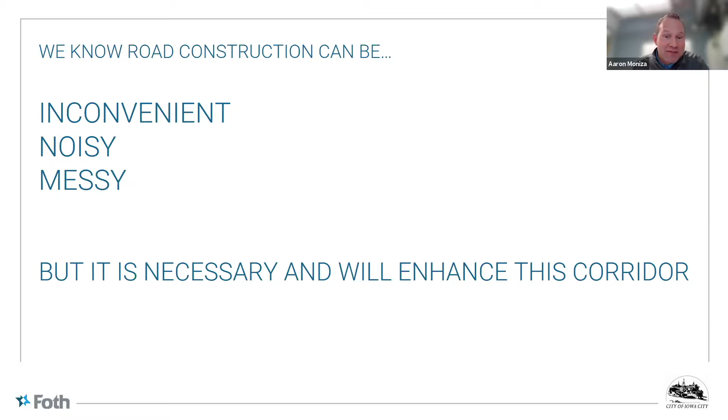Before we get into our discussion topics, we know that road construction can be disruptive. It can be loud, it can be dirty, and it interrupts the normal daily patterns of everyday life. But we wanted to set the meeting off as a kind reminder that when we get through this project, the community is going to have a beautiful, enhanced American Legion Road corridor when everything is all done. So we ask that everyone please be patient, and we'll work together throughout the construction phase to make this project a great success.

Here's our plan for this evening. First, I'm going to provide a quick overview of the project, talk about the upcoming improvements, and discuss the construction schedule. Then I'm going to hand it off to my colleague Clayton, and he's going to walk the audience through the various stages of construction and show how access is going to work in and out of the area. Finally, Mr. Sovers will let folks know how they can stay updated on the project, and we'll open up the meeting to any and all questions.

So let's jump into the project overview. It's always good to begin with the end in mind, and the reasons the city undertook improvements to this corridor are listed here on the slide. With the new Hoover School and potential future development in this area, the planned improvements will support the projected growth and upgrade the roadway infrastructure to current design standards, ultimately providing safe and efficient movement for all forms of traffic out there, be it pedestrians, bicyclists, or vehicular traffic.

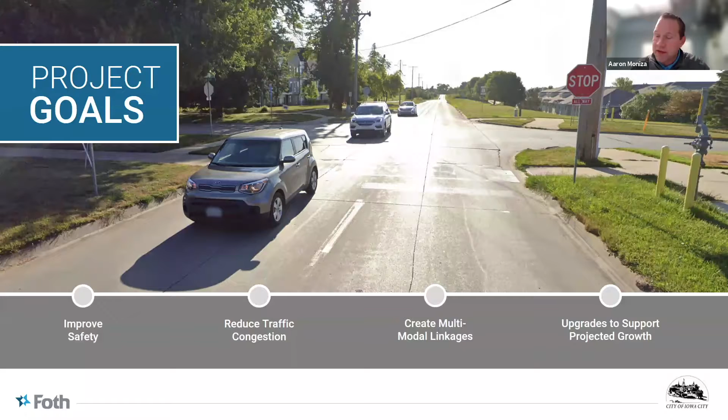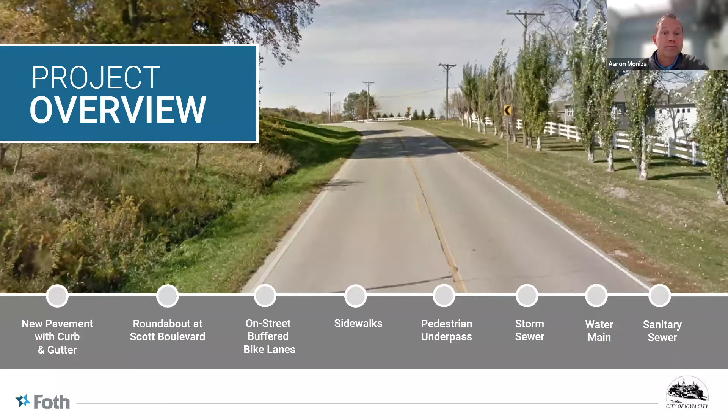The entire roadway is going to be reconstructed. This is going to include all brand new concrete pavement, curb and gutter, and upgrades to all the underground public utilities, such as storm sewer, water main, and sanitary sewer.

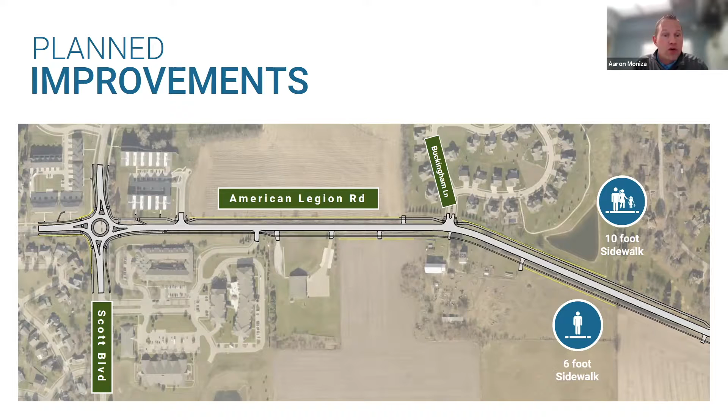A new single-lane roundabout will be built at the intersection of American Legion Road and Scott Boulevard, and this is going to help improve the safety and the traffic operations there at that intersection. The project will also include new sidewalks on both sides of the road: a 10-foot wide sidewalk on the north side, and a 6-foot wide sidewalk on the south side.

A new pedestrian underpass is going to be constructed down near the school, and this is going to have connections to the existing sidewalk system as well as to the adjacent neighborhoods.

And now finally, the new roadway will have one travel lane in each direction, as well as on-street bike lanes on both sides of the roadway.

One other thing you will notice is there will also be some improvements and relocations to some of the private utilities, including the overhead power, which is now going to go underground. So you won't see the power poles along the corridor here once we get through construction.

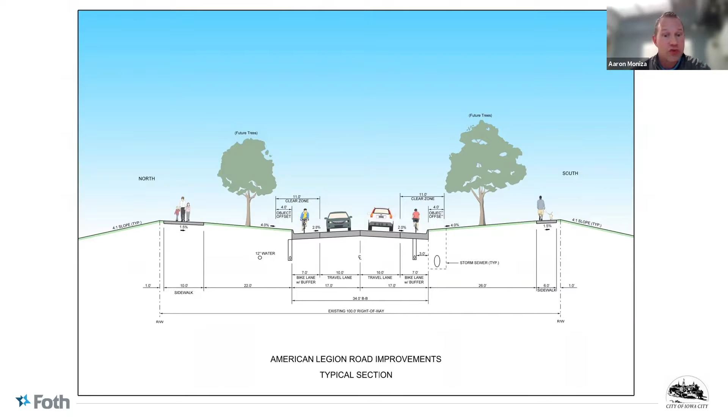So now let's talk about the schedule. For those of you that have attended either of the two previous public information meetings on this project, you know the city has been working on this for multiple years. Now where we're at is the design is complete.

The right-of-way and the easements needed for the project have been acquired. The relocation of the private utilities is pretty much done. And the contractor, PCI, is now under contract and ready to get going on construction. As of right now, construction is actually scheduled to begin next Monday, and is planned to continue until the fall of 2022.

Now, at this point, I'd like to hand this off to Clayton, and he's going to provide an overview of the construction sequence and access and what to expect here during construction. So, Clayton.

Thank you, Aaron. Again, my name is Clayton Carper, and I am a project engineer with Foth, and I will give a brief summary of the construction staging plan for this project.

As Aaron said, this is a 2-year construction project, and we'll start here in April and plan to wrap up in the fall of 2022. The anticipated construction start date is next Monday, April 26th.

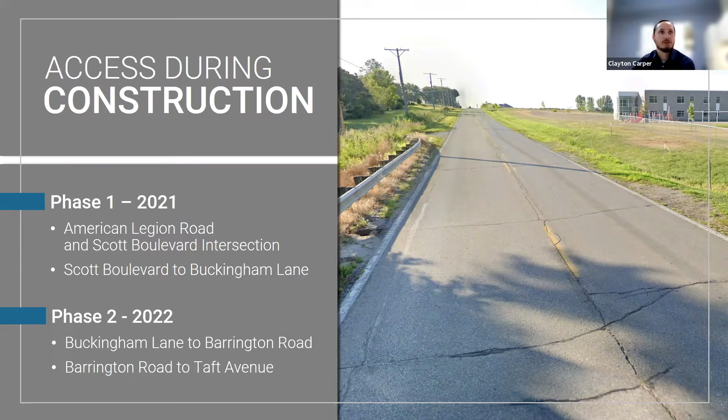Construction will begin at the American Legion Road and Scott Boulevard intersection, specifically the east half of the roundabout. The roundabout will be constructed in halves, east and west, to maintain traffic as long as possible. A temporary pavement will be constructed, and American Legion Road will be closed east of the Scott Boulevard intersection to Eastbrook.

Access will be maintained to northbound and southbound traffic on Scott Boulevard, as well as two-way traffic on Muscatine Avenue to the west. Access will also be maintained to Eastbrook Street during this stage, and a detour route will be installed for American Legion Road, which will utilize East Court Street. We'll show a detour map later on in this presentation.

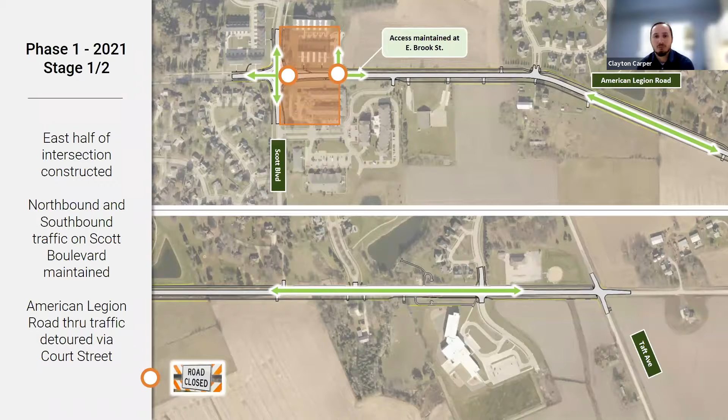Once the east half of the roundabout is constructed, the entire American Legion Road and Scott Boulevard intersection will be closed to construct the west half of the roundabout. This work will be completed under a full closure of the intersection and is planned to take no longer than 70 days. For this work, the American Legion Road detour route utilizing East Court Street will remain, and a detour route will be installed for Scott Boulevard, which will utilize First Avenue.

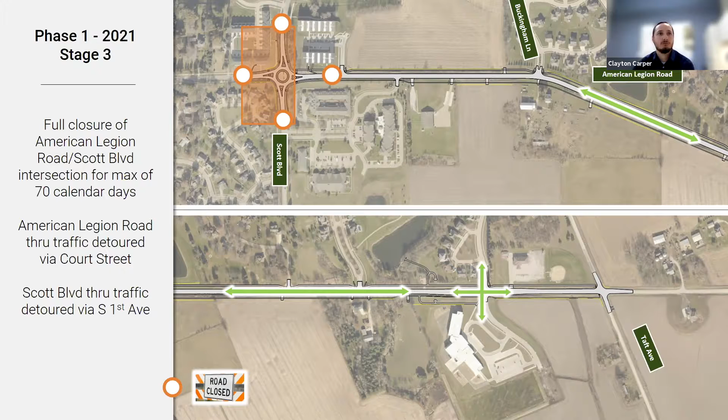After the roundabout at the American Legion Road and Scott Boulevard intersection is complete and open to traffic, American Legion Road will be closed east of Eastbrook Street to Buckingham Lane for construction of American Legion Road.

Access will be closed to those local residents who have access available other than American Legion Road—this being Silvercrest and Buckingham for this stage—and they will utilize signed detour routes. Those located within the construction limits who only have access via American Legion Road will have access maintained by the contractor during construction for those properties.

The city may look at maintaining access to Iowa City Church through Community View via the newly constructed Aiden Street. The detour route for American Legion Road will again utilize East Court Street. At the end of this stage, temporary pavement will be constructed at the project limits, and American Legion Road will be open to traffic for the winter. This will end construction in 2021.

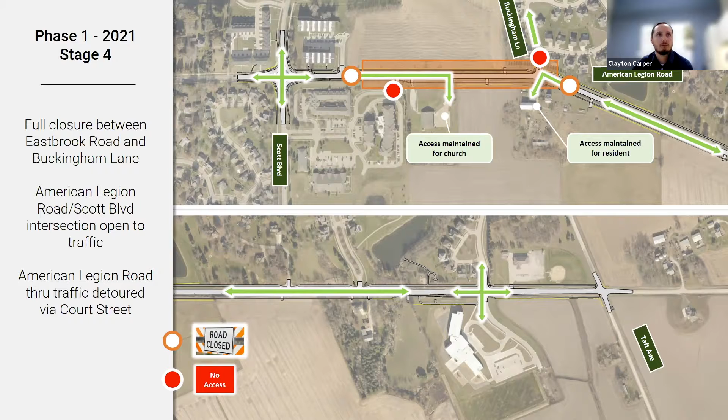Now in 2022, construction will begin where 2021 construction left off, somewhere east of Buckingham Lane. The estimated start of construction will be sometime in March or April of 2022, depending on weather. Construction will not take place within the Barrington Road intersection while school is in session.

Again, access will be closed to American Legion Road for those who have access available other than American Legion Road. In this stage, it is Fairway Lane and Arlington Drive, and they will again utilize signed detour routes. Since Fairway Lane is currently a dead-end street, a temporary connection will be made connecting Fairway Lane to Buckingham Lane, and this connection will be removed once access is opened back up to American Legion Road.

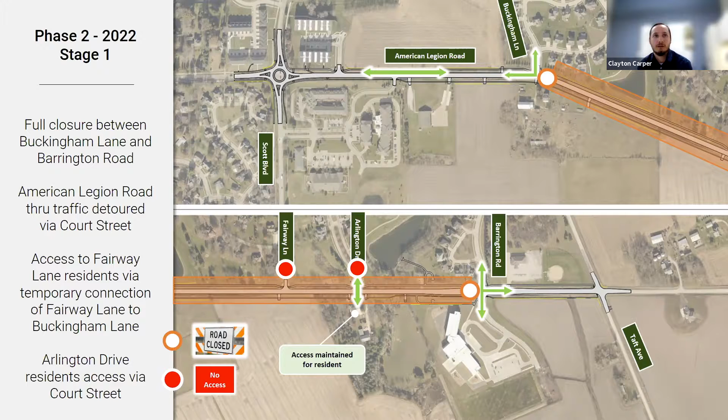Those located within the construction limits who only have access via American Legion Road will again have access maintained by the contractor during construction. The detour route will again utilize East Court Street for this portion.

So once school is out of session, the remaining portion of American Legion Road will be closed. Access will be maintained at all times to Hoover Elementary School during this stage, even though school is out of session. And the intersection of Taft Avenue and American Legion Road will maintain two-way traffic at all times during construction. It is possible that during these stages of construction, American Legion Road may still be closed and finishing construction from Buckingham Lane to Barrington Road.

The Barrington Road and American Legion Road intersection will be completed prior to school beginning in the fall of 2022. And again, the detour route for American Legion Road will utilize East Court Street. So this will be the final stages of construction for the project. And once complete, American Legion Road will be open to traffic once again.

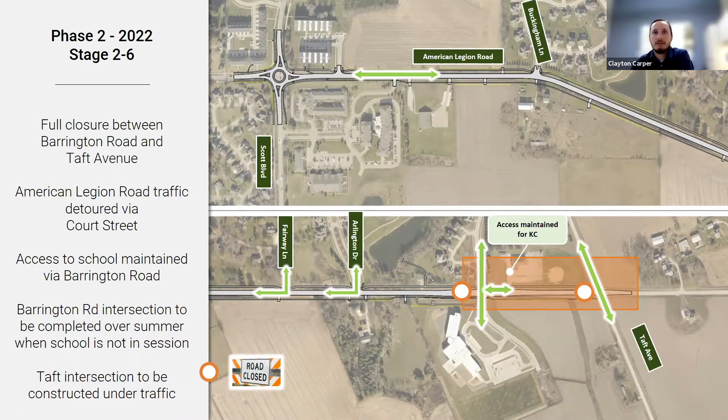So this is a detour route for American Legion Road that will remain in place throughout the entire project. The detour route will use Scott Boulevard, East Court Street, and Taft Avenue. And every stage of construction will utilize this detour route to some extent.

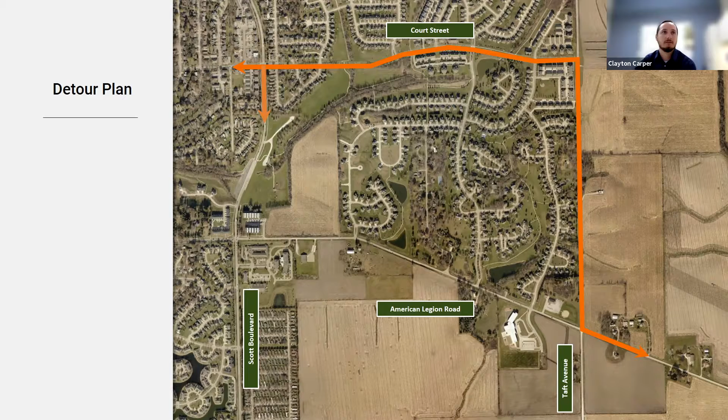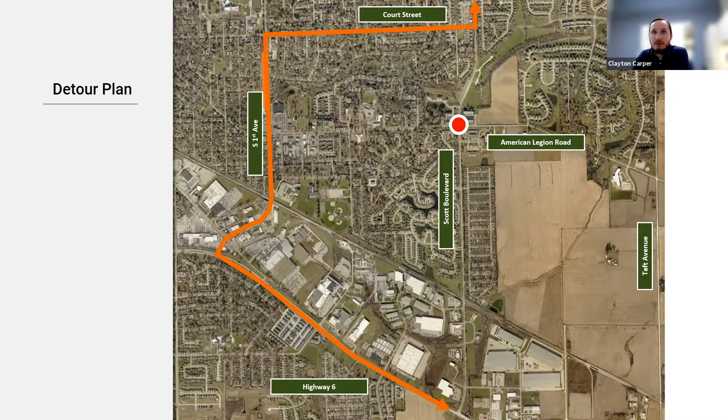This detour route shown is for Scott Boulevard during the construction of the west half of the roundabout, which will require the intersection to be closed. This detour route will use Scott Boulevard, East Court Street, First Avenue, and Highway 6. This detour route will go into effect sometime this summer in 2021 and is only planned to be in place for approximately 70 days during that construction.

So that's a real brief summary of the construction staging for both 2021 and 2022. And now I will just go over a few common questions that come up most often during construction. The biggest one being access.

So during construction, American Legion Road will be closed to all traffic. However, the contractor will maintain access to properties who only have access via American Legion Road. At times, there may still be some interruptions during paving operations, but you will be given advance notice if you are impacted. Mail delivery and garbage pickup may change depending on where you are located within the project.

Some locations will require cluster mailboxes that will be installed at designated locations. And for garbage pickup, you can set out your trash and recycling as you do now, and the contractor will empty bins and return them to you. And there may also be slight interruptions to water within the project, but again, you will be given advance notice for these instances.

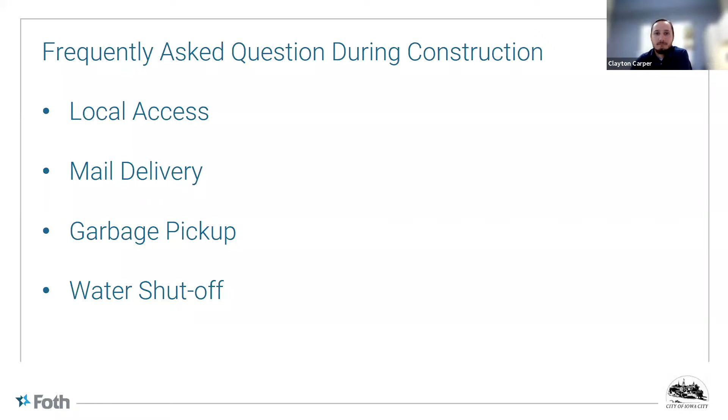Now I'll turn things over to Scott Sovers with the City of Iowa City to discuss project communication and help answer any questions.

Thank you, Clayton. Again, my name is Scott Sovers, and I am the Assistant City Engineer for the City of Iowa City. I will be your main point of contact for this project. Should you have any questions, as Aaron had pointed out, I included my contact information at the beginning of the presentation. We can certainly go back after we get through the presentation, so everybody can write down emails and phone numbers if need be too.

But in terms of communication, outside of getting in touch with me directly, we do have a website that will be set up for this project. The web address is shown there. We will periodically update the status of construction on the website, so you kind of know how construction is progressing throughout the project. We are also planning to set up an email list where we will send out periodic emails giving folks an update on construction. If you are interested in being a part of that email list, please get in touch with me and I will get you added to that list.

And like I said earlier, if something comes up and you feel more comfortable, just give me a call or shoot me an email, feel free to do that as well. And as has been noted on this slide, construction is impactful and it's disruptive. But please, as you're driving through the construction area, drive slowly and with care. Safety is our priority for both the construction workers and the traveling public, both vehicular and pedestrian. So with that, we'd be happy to open it up to any questions anybody may have.

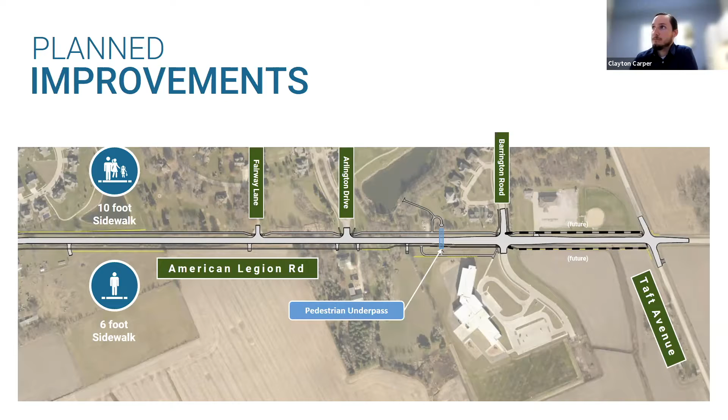Great, thank you very much. You're welcome. Aaron, someone was asking if you could pull up a slide of the roundabout to show the truck apron. Sure can, let me slide over.

Can you see, is there a new layout now? Can people see the layout? Yep.

So folks, to that gentleman's question we just asked, this gray area here is what's called the truck apron. It's delineated differently than the normal through lanes. Regular vehicular traffic, passenger cars, single unit trucks, use this light gray area, but this darker gray area in the middle is the truck apron, which allows larger trucks to off-track and use that. Now the colors are a little misleading - that doesn't apply to these four splitter islands, which are raised. It's really just here in the middle. But semi trucks - the geometry of the roundabout is designed to accommodate those types of vehicles, the large semi trucks.

If I may, Scott, I know another question came up in the chat about whether this information will be posted on the website for folks who aren't able to attend. Yep, the answer is yes. As a matter of fact, this virtual presentation is being recorded, and the city will get this posted to the project website at the conclusion of the meeting tonight, so anyone who wasn't able to make it can view it. There was also a follow-up about whether updates will be posted to the website as we move forward in construction.

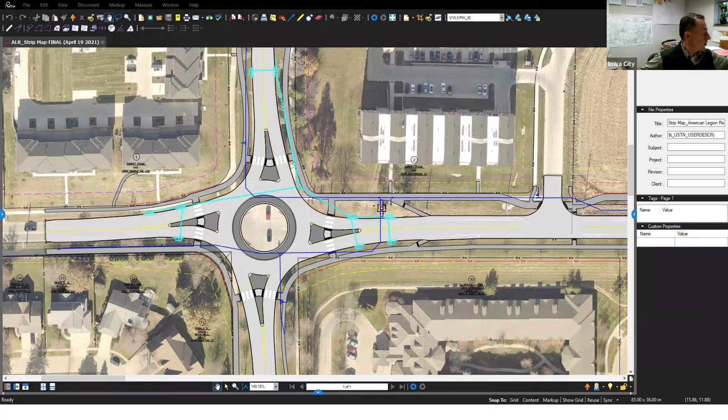Scott, just a follow-up question - could you tell us the diameter of the roundabout without the truck apron, just to get a sense of scale and size? Sure. Clayton, do you recall what that is off the top of your head? Off the top of my head, I don't, but I'll check that right now while we're talking.

While I'm looking that up, there was one other question asking about possible improvements to Taft Avenue, south of American Legion Road down to 420th. I know there were some thoughts - I don't know if you want to talk about that. Yep, so the county is looking at a project to do some grading and chip sealing of that section of Taft Avenue. They're looking at doing the grading and redoing the granular surfacing sometime this fall. My understanding is they typically like to do that a year in advance of when they actually chip seal it. So I'd imagine if they do the grading this fall, they'd be looking at doing the chip sealing maybe late summer, early fall of next year.

Another question that was brought up in the chat was regarding - I know we've been talking a lot about cars and trucks at the roundabout - but how safe is the roundabout for pedestrians to cross? The short answer is it's actually very safe. In a lot of ways, roundabouts actually improve both the safety of vehicles as well as pedestrians.

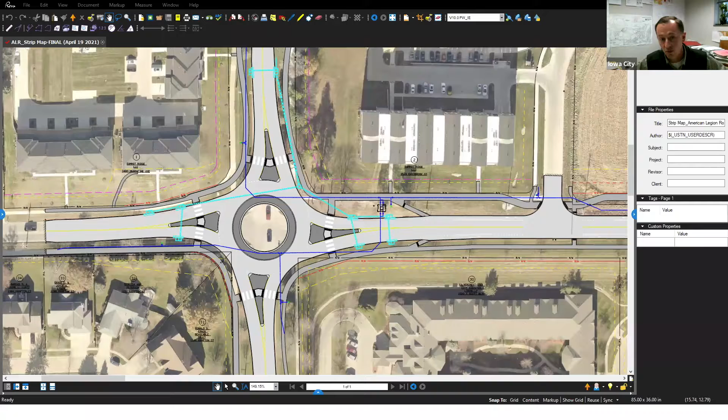Yeah, I can take that one. As a part of our project design, when we started out on this project, we did take a look at different traffic control options for that intersection. And what came out of that is currently an all-way stop at the Barrington Road and American Legion Road intersection is not warranted. It's not to say that it wouldn't be warranted in the future. However, in terms of adding a four-way stop, that is something that could invariably be done at some point in the future.

Getting back to Jerry's question, I did check - so the outside diameter, which would be the radius at the edge of the splitter islands, is 140-foot diameter, and to the outer edge of the truck apron is 94 diameter. So you can see it's a fairly large roundabout. Thank you, Clayton. Yep.

We have a question/comment that came in regarding the reasoning on where the pedestrian underpass is located, and why it wasn't located maybe closer to the school. The reason driving that was just looking at the profile of the roadway and balancing the grades and elevations we needed to fit that box culvert underneath. Doing that closer to the Barrington Road intersection would have just been very problematic with what the elevations are there.

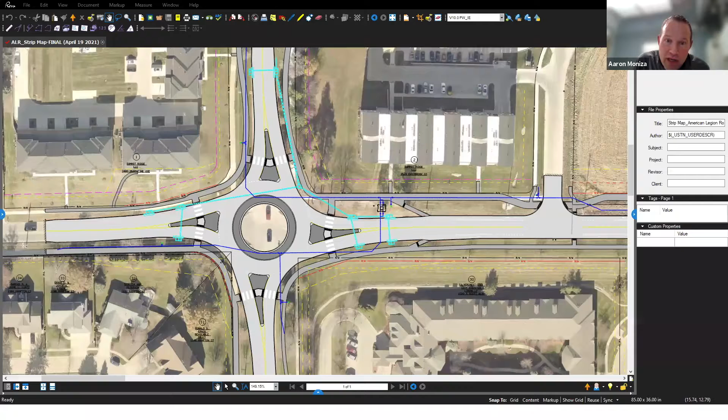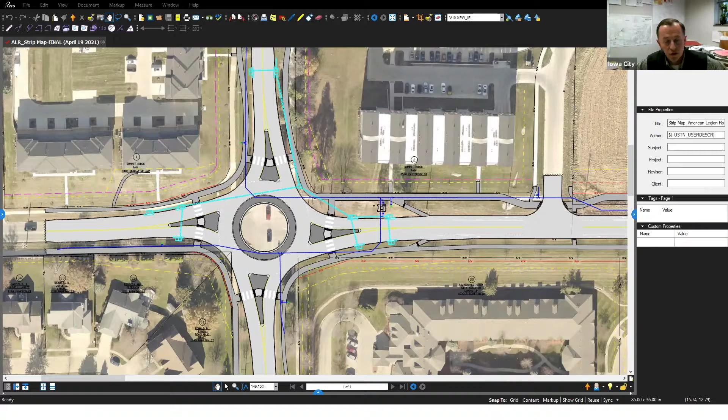As we looked at the corridor, the location of the pedestrian underpass was really the ideal spot where we had room to fit it in, without affecting the profile of the road and causing additional impacts to the corridor, particularly with grading and impacts to right of way, et cetera. Aaron, could you shift the view over to that? Certainly. Yes.

Just to expand on Aaron's response, as we head further to the west, we have more vertical relief to be able to get that box culvert or pedestrian tunnel put in there. As we move further east towards Barrington Road, the school and the backyards of the properties off of Barrington Road on the northwest corner of the intersection start to get closer to the roadway elevation. So we would have to do a significant amount of grading and retaining walls, which would require us to get additional right of way and impact more of the school and the backyards of those two properties.

Another good question was why was a roundabout not put here at this intersection? I guess I could take the first stab at that. Really a combination of reasons: the first was - a roundabout could be there, but it's not really warranted with the traffic at that intersection.

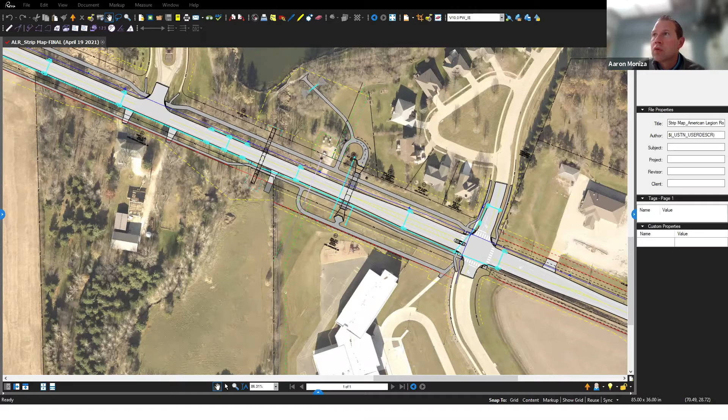Let me go back here. Okay, here's Buckingham. Scott, which one is Windsor Ridge again? Maybe in the Buckingham area, right there, here?

Currently, the way staging is set up, during the second year there will be a hard closure just east of that intersection, potentially right in here. When you have the hard closure there, if you're coming eastbound on American Legion, are they going to cut down Buckingham to get to the neighborhoods to the east? There could be some. We are still signing the detour to go up to East Court Street. There will be those who find out that they can do that, whether or not it's a real time savings. If they live in the area, it may be.

That whole intersection, as far as the 2021 construction, PCI is going to get as far east as they can. Where exactly they end up is still kind of up in the air. The intent is to get them east of Buckingham so that intersection isn't affected for two construction seasons. But I'll leave it at that for right now.

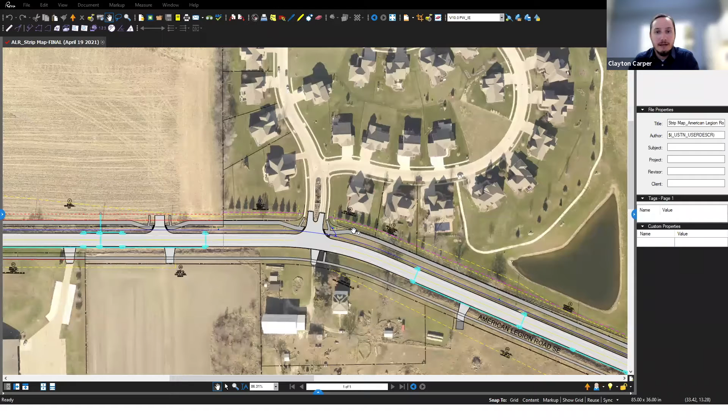I got a message asking about the horizontal bend in American Legion Road at Buckingham, if it will be the same as it is today. They bring up the point that turning into Windsor West, traveling eastbound, can be somewhat blind. To address that, the horizontal curve there will closely match the existing roadway. This was actually a question by Howard. The new speed limit on American Legion Road is going to be posted 25. With the posted 25 and the grading of the trail, the crosswalk there should make that intersection more visible when you make that eastbound left turn onto Buckingham Lane. But to answer your question, that horizontal bend is going to match what it is today closely.

Thanks, Clayton. Yeah, a great reminder that the posted speed limit is going to be lower here. So again, a nice new multimodal corridor with efficient but slower speeds of traffic.

I think what's going to help most with that intersection is the grading we're planning to do, pushing the sidewalks back, so the area from the back of curb to the back of sidewalk will be, for all intents and purposes, fairly flat. That'll give you a better sight distance around that curve.

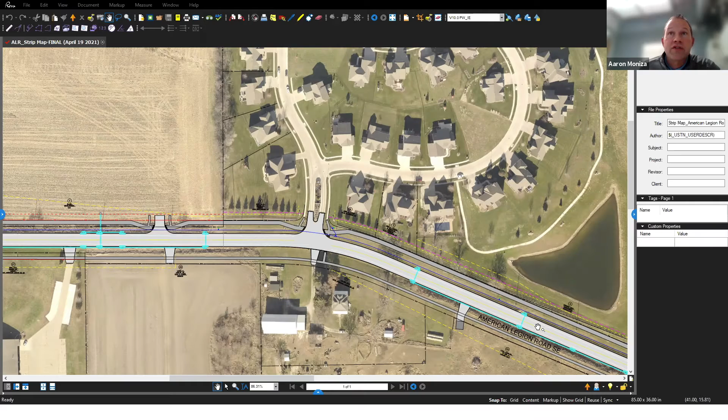Let me zoom out here. All right, so here's Fairway Lane. If you remember from earlier in the presentation, next year in 2022, when we start construction again, the first segment that's going to be done is this area between Buckingham and Barrington. At that time is when the temporary connection from Fairway Lane to Buckingham will be made. Once this opens up to traffic, that's when we will take out that temporary connection and return it to its existing condition of not going all the way through to Buckingham.

To add to that a little bit, Fairway Lane really won't be able to be used as a pass-through, mainly because in its current configuration it is a dead-end road. Once construction is on American Legion Road and we make the temporary connection to the north, it will basically remain a dead-end road, only from the other direction. Then when American Legion Road is finished, that temporary section will be removed.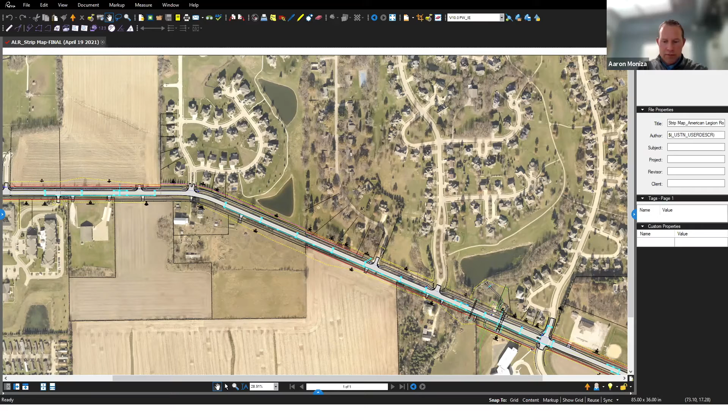Thanks, Clayton. So basically, the temporary connection won't be made until the intersection at American Legion and Fairway is closed. Correct, yep.

Just to follow up on that, that connection will be in place likely for most of the construction season. I would say starting in the March, April timeframe, all the way to probably the fall, maybe late October, early November.

I think Martin had a note about the semis and farm machinery access to the southern farm fields. That is certainly something we're aware of, that will still need to be maintained, so we can work with our contractor and make sure the farmers have access to those fields to the south.

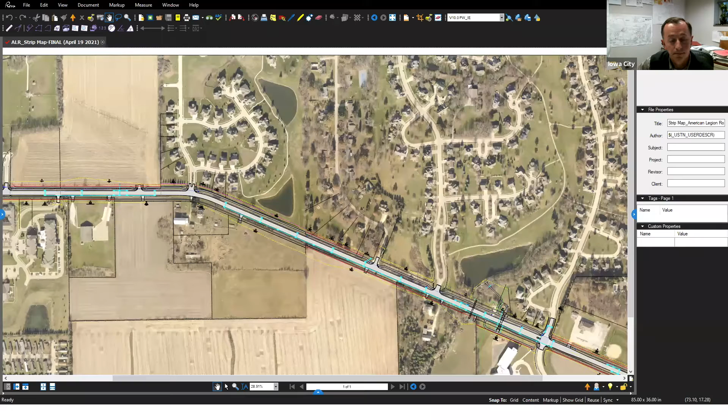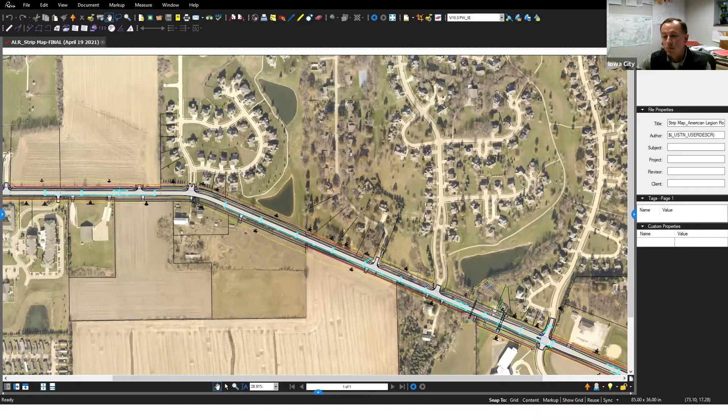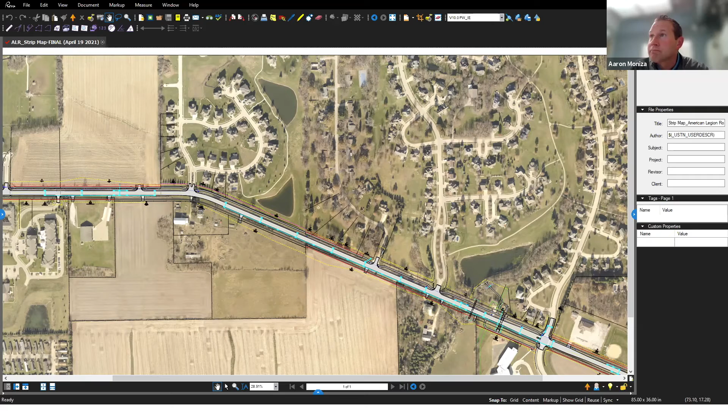I see there's been one more comment here on Fairway Lane, just about Fairway Lane residents. I hope we explained that for the most part, really the only folks that would need to be going down there are someone that lives there. So I hope that addressed those questions.

Scott and Clayton, I think we're caught up on the questions. I see something just came from Sarah.

Yes, we thank you, Sarah. We appreciate you and everyone listening in and all the great questions. And yes, we agree, we are excited as well to finally get this going and having Jesse and PCI start moving dirt and removing pavement, and you'll start to see things come to fruition. As we said earlier, folks, we know construction is a pain and it's inconvenient and messy and dirty. Trust us when we say on behalf of the city and PCI, we're doing everything we can to try to keep these construction projects moving forward as expeditiously as we can. But we also want to make sure things get done correctly and right, and these things just take a little bit of time. So we appreciate everybody's patience.

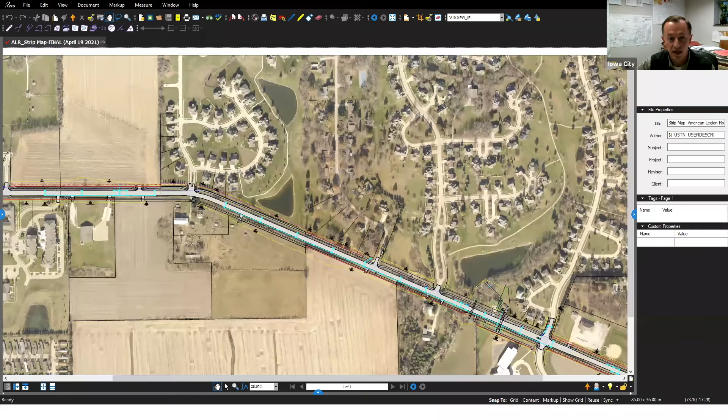I think one other thing to note is as stuff comes up, if anybody has any questions, comments, or concerns in any part of construction, please reach out to the city and let us know. We want to know those things so we can address them. Reach out to myself, and I can hopefully try to address those concerns or make changes on the construction side to make things better for everybody.